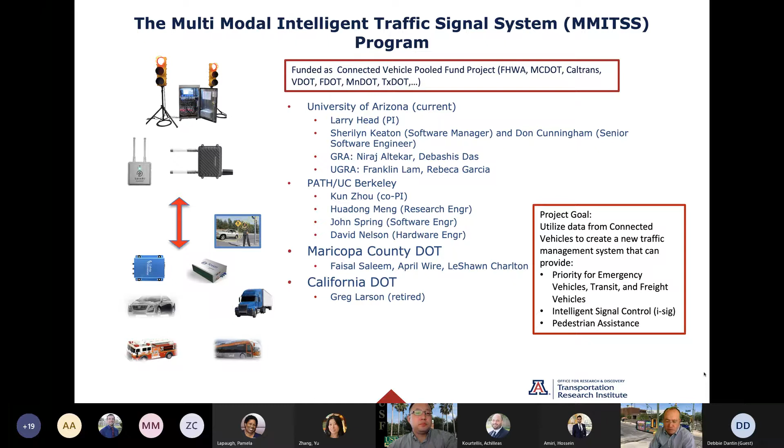What the Connected Vehicle Pooled Fund asked was they wanted to use connected vehicle technology to create a new generation of traffic control or traffic management system that could provide priority for emergency vehicles, transit vehicles, and trucks, could do intelligent signal control, and then they asked for some pedestrian assistance to be integrated into it.

So we started back in 2012, we did a ConOps and requirements, and then we did a demonstration in phase 2 that started in 2015. If I was going to have any gripe with the pool fund, it would be that they have these large gaps between work years. You get a bunch of students funded and then you wait a year or two and then you fund them again. It's a little challenging at times, but we built the prototype system and we deployed it and we tested it.

We did tons of demonstrations and taught people about connected vehicle technology. And then what they asked us to do, which is really unusual for an academic project, is they said, well, it's really nice, but it's hardware dependent and we want you to be deployable. So can you turn it into something that's more deployable? We've had to go back and redo all the source code and documentation and things, and we're in the middle of a 90-day field test. With COVID going on, field testing is really hard.

So some of the basic ideas go like this. If you have a traffic system, typically if you're going to manage it, you break it into control sections, right? And maybe in this section of the network, you have a bunch of warehouses and manufacturing facilities, and the vehicles that are going to be traveling through there may be a high percentage of freight vehicles.

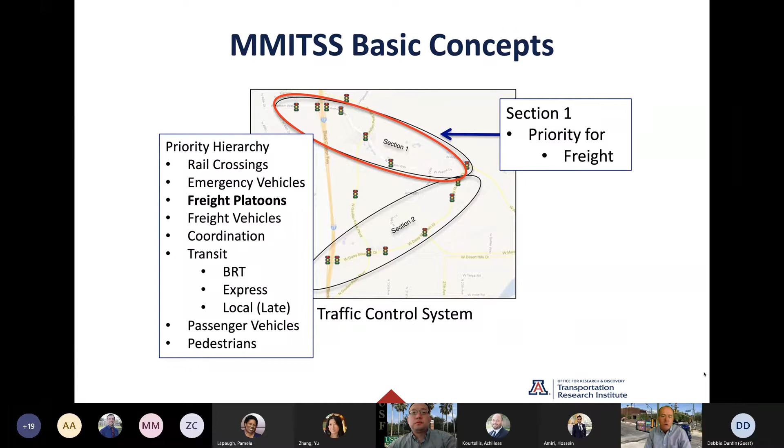So you might want to set up a hierarchy for control. Of course, rail crossings are first and then emergency vehicles, but maybe we want to give priority to freight platoons and then freight vehicles. And then maybe we want the signals to be coordinated, and then transit, and then passenger vehicles and pedestrians. So that might be what the operating agency feels is their level of priority for different kinds of vehicles. Here's another section where maybe there's a lot of transit and pedestrian, and we would want to give priority to transit vehicles, and then maybe strings of vehicles and pedestrians and passenger vehicles. However they want to set this up, that should be there for them to decide.

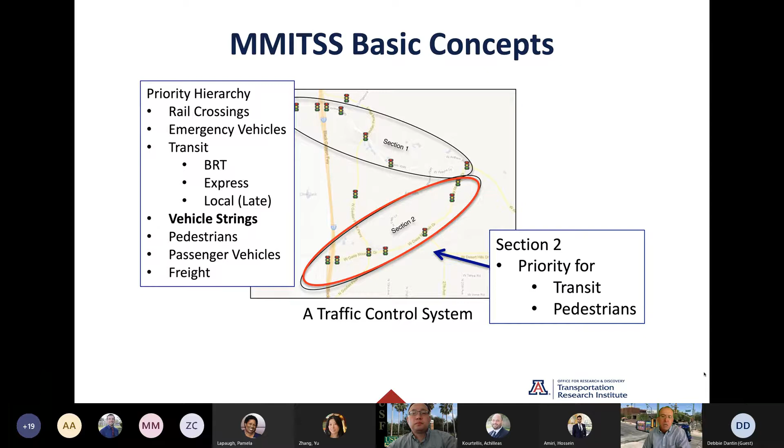And in a connected vehicle world now, we would have lots of data to help us set that kind of hierarchy up. The other thing that's really great in a connected vehicle world is that we can measure, or as Wei-Bin Zhang at Berkeley called it, observe performance by mode, by movement, by section. So we can get all the traditional measurements, but I want to introduce this idea of smoothness of traffic flow to you later today.

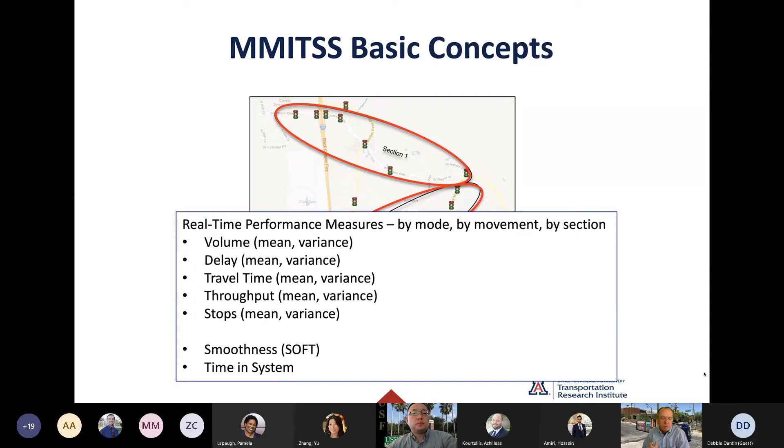So something that we call SOFT. Just a few characteristics - I think it's a little bit more of the history, but we use all the connected vehicle messages that are defined in the J2735 standard: basic safety message, map, signal request, signal status message, and SPAT.

ISIG really is what we think of as adaptive control, and it's an outgrowth from some work in the 90s on RT-TRACS that Federal Highway did. And then if you're familiar with RHODES, that Pitu Mirchandani led the effort on, one algorithm in RHODES was called the COP algorithm, which Suvrajeet Sen and I wrote, and then OPAC with Nate Gartner. So the ideas around that component are really motivated by them, and Yiheng Feng, a student, he modified it to do some things with the dilemma zone.

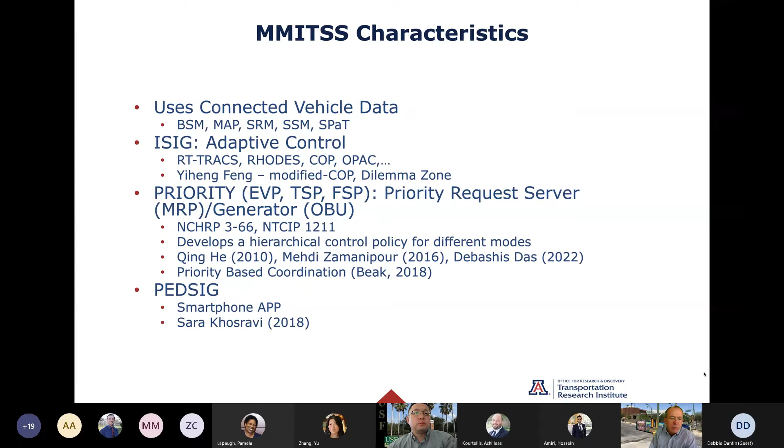And then the priority work really started back with a project called NCHRP 3-66, which Tom Urbanik, Darcy Bullock, and I, and Doug Gettman worked on, and that became the NTCIP 1211 standard. It really sets up the framework. And then I've had several students, including Qing and Mehdi, and now Debashis, working on this priority-based control. And then Sara Khosravi was a student who did the PED-SIG, and she works at CAPSH now, and they've taken it and made it into a product that's out there.

So just to frame this up: when a priority-eligible vehicle - whether it's an emergency vehicle, freight, transit, coordinator, a platoon of vehicles or string, or another intersection - gets in the range of the RSU or wants to communicate with the RSU, there's this map. Vehicles receive the map, and compute their position on the map and use that to estimate their estimated time of arrival or their desired service time. Now if you're shaping the trajectories like you guys do in your research, that time may be the departure time in your algorithm, right?

Then the vehicle sends something called the signal request message to the roadside. The infrastructure responds back with something called the signal status message, which really is an acknowledgement of the SRM. If you send me a desired time of service, I'll send it back to you from the infrastructure to make sure that we're in agreement. Then when the vehicle passes through the intersection, it can send a cancel, and the infrastructure can go back to other priorities. This is really the use case for priority-based control.

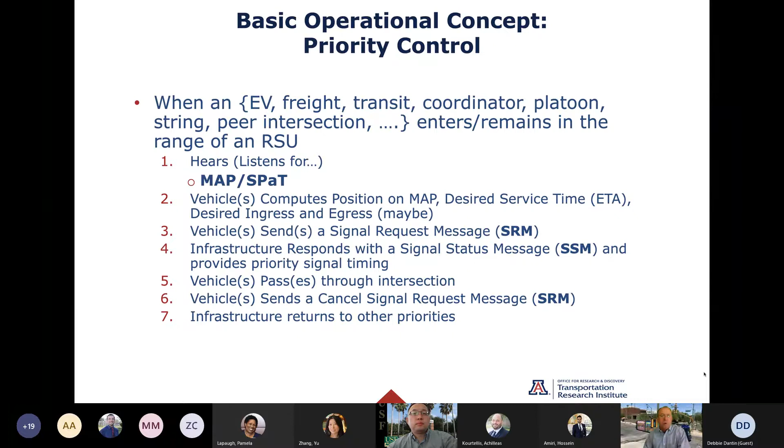Who can ask for priority? Well, all these different kinds of vehicles, and coordination, could ask for priority, and I'll explain that in a minute. And then these platoons and strings, which we're working on now, how to get this done. And then queues and other intersections. We did for Utah DOT, who's a big user of MMITSS, a peer-to-peer capability for them to kind of give more headway into getting the priority requests in the system.

So this is the architecture for deployment. This is really kind of funny because I drew this diagram in 2011, I think, and we haven't really changed it. You start down here with vehicles, and we have two kinds of vehicles: equipped vehicles and unequipped vehicles. An equipped vehicle has an onboard unit that can talk to a roadside unit.

That roadside unit communicates with something we call the MMITSS roadside processor. Think of this as an edge processor. Actually, we're working with Intel. They're building something called a smart RSU that is an edge processor along with a radio unit.

And then that's what communicates with the traffic signal controller. The same way with the non-motorized travelers, they might have some type of nomadic device like a smartphone that could connect into the system through the cellular network or Wi-Fi or somehow. Maybe someday with 5G we'll have a more direct link there. And then that closes the loop over there. And then, of course, there's security that you have to take care of up at the top.

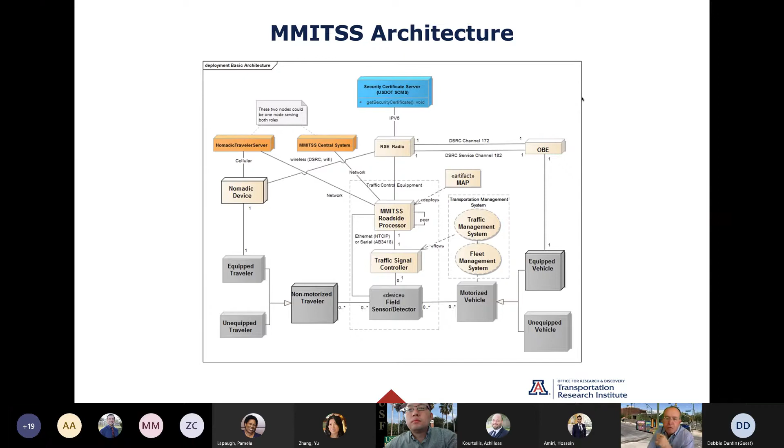So I'm happy that this diagram has survived over time. Our MMITSS architecture, this is our software architecture. I like to talk about this before I talk about the algorithms, because then you'll kind of see where things fit in. So we have a MMITSS roadside processor, that's the edge processor, and then we have a server that's available, and then every vehicle has a vehicle processor.

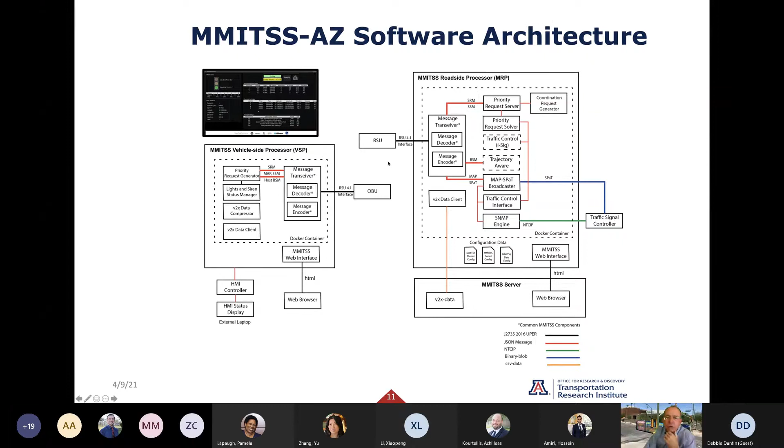And because in phase 3 they want us to be agnostic to the brand of the RSUs and the OBUs, we used a standard interface that Federal Highway defined, this RSU 4.1, to be able to talk to them. And then we have a little display, I'll show you that in a second.

So let me talk about the roadside processor. The roadside unit is really just a radio to us. There's no processor in this unit, right? And so we have this message transceiver that encodes and decodes messages. We do this in this component because as the standard evolves and changes, we just have to update this component.

Then these messages inside the box - the priority request server receives signal request messages and turns back signal status messages, but they're not formatted as messages, they're just JSON strings that we pass around between the components. The priority request server is responsible for taking the requests from all the different kinds of vehicles and managing them and setting up that hierarchy.

And then really what I'm going to talk a lot about in a few minutes is this priority request solver, which solves an optimal scheduling problem to be able to accommodate the priority requests. And those requests could come from coordination.

The two components in the middle, the ISIG and the traffic control and trajectory aware, are dashed lines because in the phase 3 effort we haven't put a lot of effort into redoing all that code - in our field deployment we just don't have the market penetration that's really required to accommodate doing some intelligent control or adaptive control with the small amount of data that we have available. We have 15 vehicles, and that's not enough in a network.

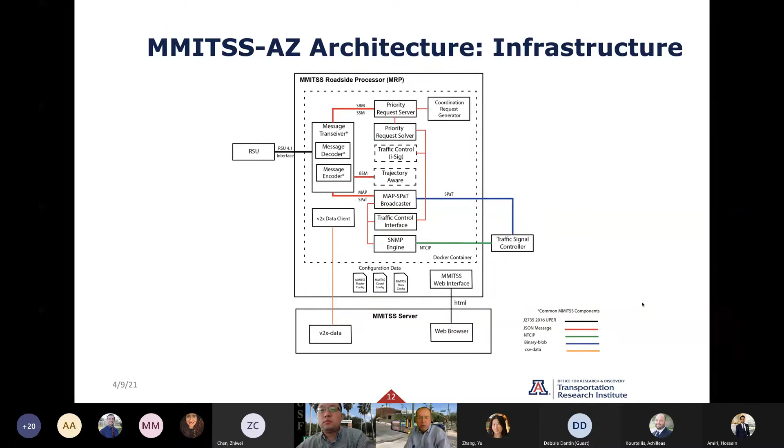And then on the vehicle side, it's exactly the same message transceiver, because we want to get rid of all those nasty rules of encoding and decoding messages, right? And then we pass the same kind of JSON objects off to something called the priority request generator.

The priority request generator is this part that's keeping track of the vehicle position and taking the position and seeing if there's an active map. And if there is a map and you're on the map, then it generates the request for priority. All right, so it's the vehicle side logic.

And if it's an emergency vehicle, we have to have an interface to the lights and sirens. So we have a lights and siren manager. And then because we don't have real-time offloading of the data, we just do compression of the data that's there, and then we offload it at different times with a laptop.

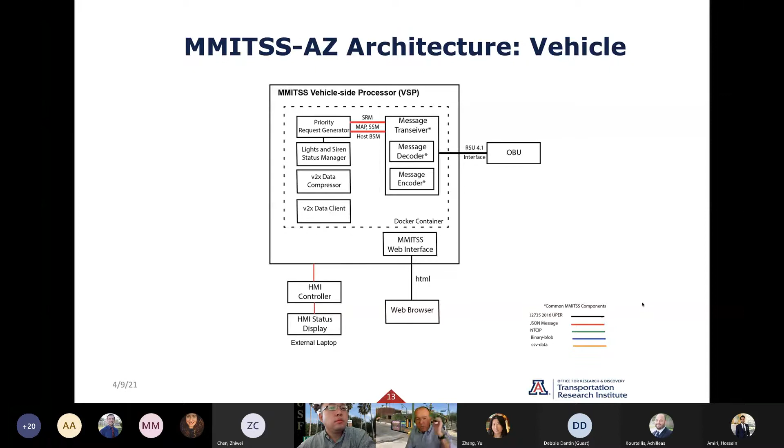We have this display that we've created that's really just intended to help us when we're out in the field testing. So it shows you in the upper left-hand corner the SPaT data with the minimum and the maximum phase times and what the display is, which depends on what lane of the map that you're in.

Shows you what the signals are doing, what phases are green, yellow, and red, and whether there's pedestrian service going. For the host vehicle, we have what kind of vehicle are you, what's your temporary ID, your speed, and information like that. There's a couple of indicators at the top.

So when you're on a map, at the bottom, you'll see we have a list of 5 maps that are available. And when we receive a map message, we retain that for up to 5 minutes, 300 seconds. And then we delete them to keep the cache of maps cleared.

But when we have a map and we're on the map, we show it as being on the map. And then when we send a request, our request will be active. Then the active request table, the signal status message comes back out with all of the requests from all of the vehicles.

So there's an EV vehicle that's requesting, and a transit vehicle and a truck vehicle. And so whether they're rejected or granted, how many messages have been received, what lane of the map they're on, what their arrival time is. And then if there's other vehicles in the area, we call them remote vehicles, we get their basic safety messages.

And so this has been a really great tool when we're doing demos or we're out in the street testing, so we can make sure that everything is on the vehicle side, looks good.

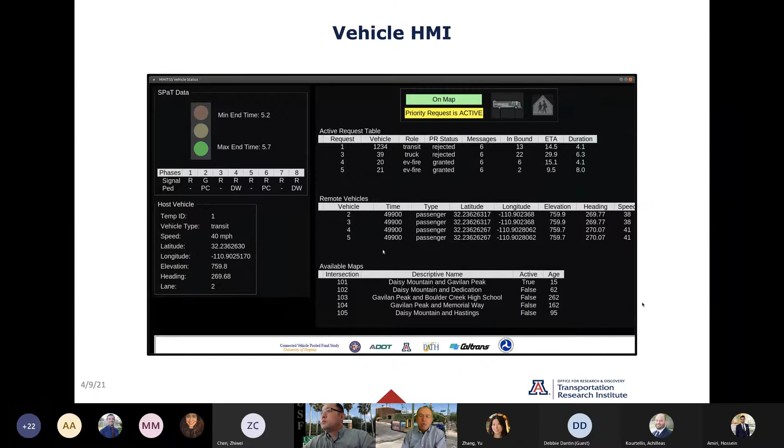If you're interested, you can just Google MMITSS and GitHub, and you'll find all the source code. We try to keep it up to date. We have a new release every so often. We're about to have one next week, has some new features in it.

There's some common components. There's a map engine and a message library that Kun at Berkeley developed that are really, really useful components if you're dealing with this, so you don't have to deal with the map message itself. You can just call the functions in the library. And so this was a great contribution from Kun.

And then if you want to run things and you don't want to be the software engineer that builds it, you can just download the different Docker containers. So there's x86 base for doing simulation. There's one here that says updated 5 years ago, that's the phase 2 version of MMITSS. Then there's the ARM base, and we use ARM base for both the vehicle and the roadside unit processors. So you can download these.

Okay, so that's enough about the system itself. Now I want to talk about the basic principles behind priority-based traffic control. I suspect this group knows a lot about traffic control, but this is a diagram that I use to describe some of the terminology.

So this is an intersection. This is in Noblesville, Indiana. This is from a project Darcy and I worked on.

Down here in the corner is the dual ring 8-phase traffic signal controller, which is the standard in North America and used in many parts of the world. Other types of controllers have other kinds of logic to them, but we really focused on this one because it's the most common in North America.

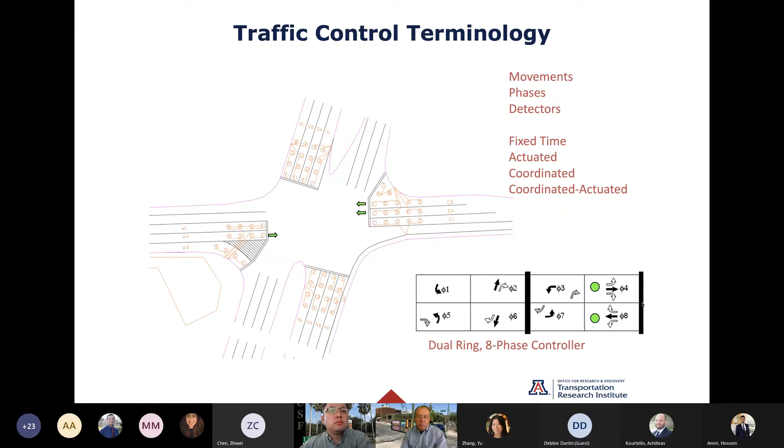There are lots of kinds of ring barrier controllers. Our company had one that was 20 rings, 40 phases, and 26 barriers. 26 is a magic number because we represented them by letters, A through Z, so that's why we were limited. But what I did, when I left industry and came back to academia, was...

I was really worried that we had this software but didn't have an underlying model. So a model of this dual ring controller is this precedence diagram, and this shows two cycles of what I just showed you, but represents it in a more mathematical way so we could bring it into an optimization problem. It's the same thing.

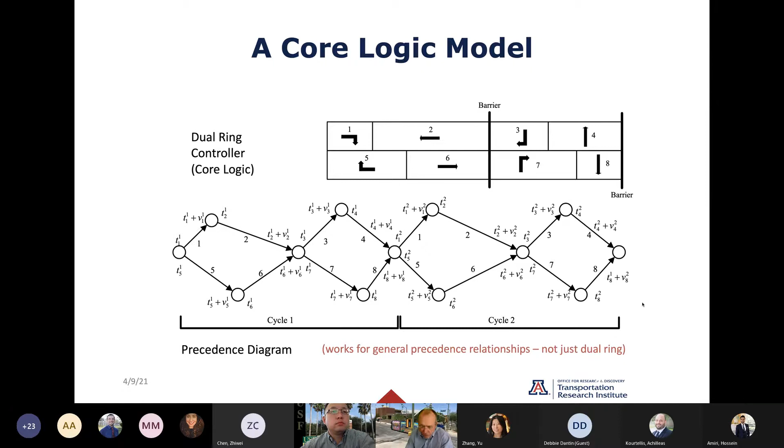Phase 1 has to time before phase 2 because we can only have one phase active in a ring at a time. Phase 5 and phase 6, and then when we cross the barrier, we get to 3 and 7, and 4 and 8, and we repeat this over and over again — this sequence repeats. So now I have this graph structure, a precedence graph, that we can use for different kinds of controllers, but we're just doing this dual ring 8-phase for now.

Every phase in the precedence graph also has its own precedence graph of these sort of intervals. You have to have a minimum time — minimum is a safety parameter in a traffic controller. Then you have an extension period where, if there are detectors, you may extend out for some amount of time for every detection event. You could have a signal control prioritization in the NTCIP 1211. We have an interval you can extend there.

If the pedestrian is serving, then you get the walk and the flashing don't walk, and then a don't walk interval. The walk and flashing don't walk have to time before you can terminate the phase. And then some controllers have a minimum, an alternative minimum green time. So these really constrain what we can do to the phases in terms of stretching and compressing them.

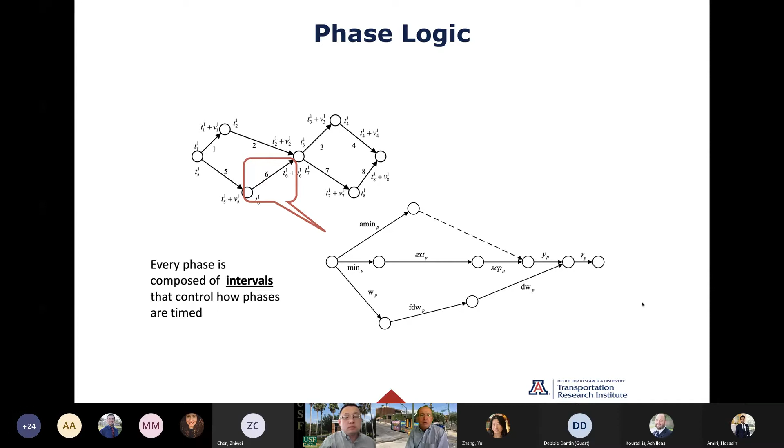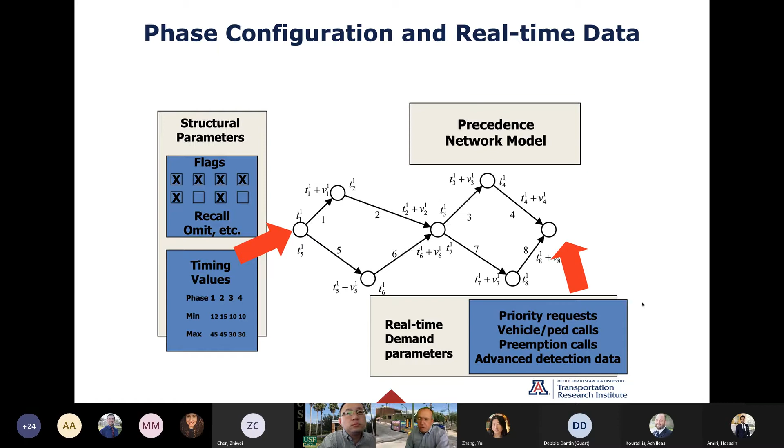So you take all these structural parameters — whether phases are in use, recalled, or omitted, whatever — you take the data that goes with the phases, the timing values in the database, you take the real-time data that goes with it, and then we can form this precedence model. That's what we're trying to do.

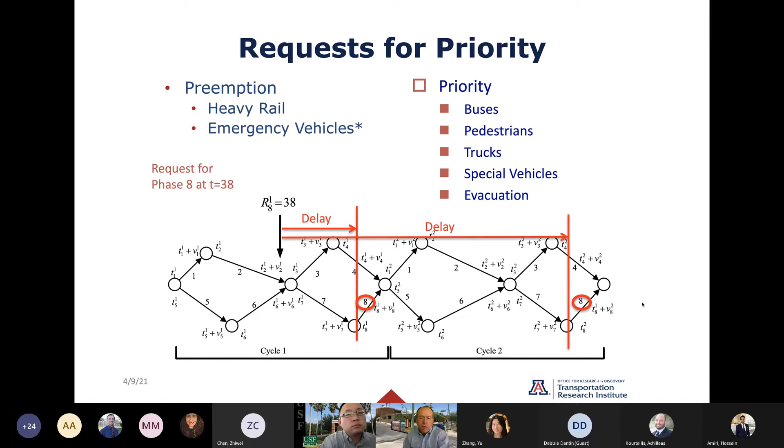So there's delay before it could be served there, or there's this amount of delay. Clearly, the obvious thing is I want to get phase 8 green as soon as possible. So if I could compress this down a little bit and get there, I would reduce the delay for that request.

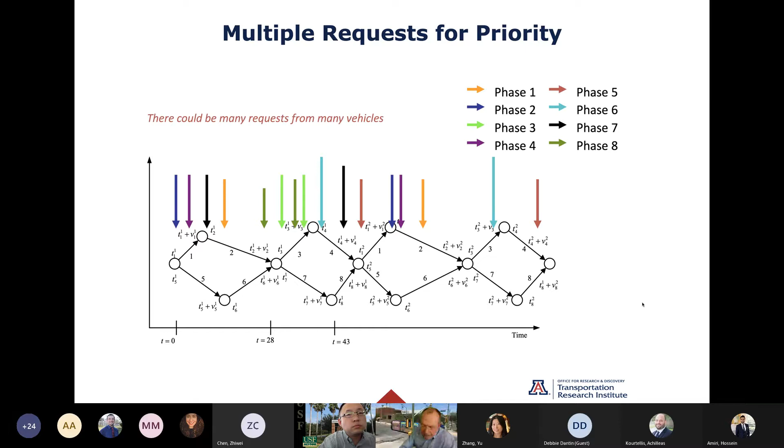But I can have all kinds of requests, and we've done this. We've had requests for every phase occurring randomly throughout from all different kinds of vehicles. The problem is that this is a math programming problem. It's a mixed integer linear program, and it takes time to solve. So we can't really accommodate an infinite number of requests because every request adds to the problem.

This is the model formulation. I'll go through this a little bit, but we minimize what we call the multi-modal delay, and that's the delay from transit, trucks, and emergency vehicles. We have coordination delay, which is another consideration. If we want the signals to be coordinated, we treat that as a form of priority.

And then we've added this other term on the end called actuation flexibility. This goes to wanting to have flexibility in the signal timing to allow phases to gap out or allow phases to do their natural behavior with the vehicles that are locally present. I'll show you how that's in there. Notice it's a minus sign in a minimization problem, so we want to make that as big as possible. We want as much actuation flexibility as we can when we're dealing with all of these delays.

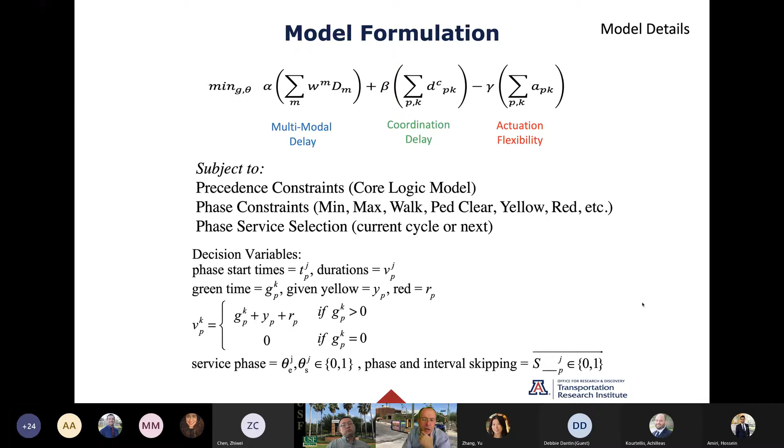So then this is subject to the precedence model, the phase constraints from that I showed earlier, and then something I call phase service selection constraints. The precedence constraints are easy. These are nice, simple linear equations. Anybody could write these—this is a no-brainer. It just represents the precedence graph.

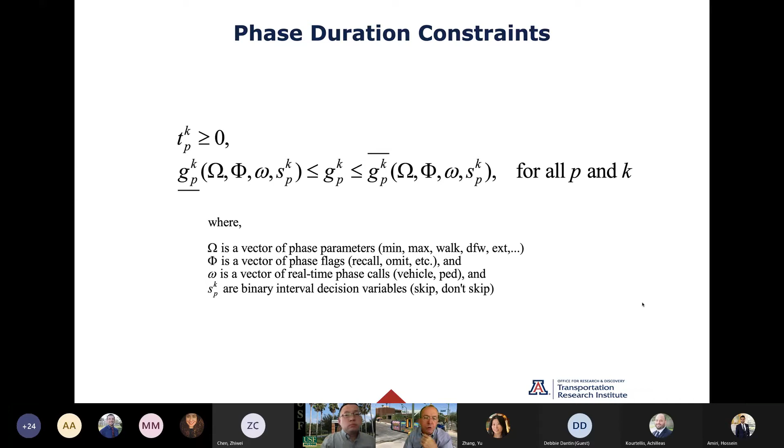The phase duration constraints, while it may look fancy in this diagram, really just take into account all the different parameters, the flags, and whether there's real-time calls to get a minimum and a maximum green time. So there's some logic, these functions that take these indicator variables, if you will, and develop a minimum and maximum green time. That's really all that this logic does.

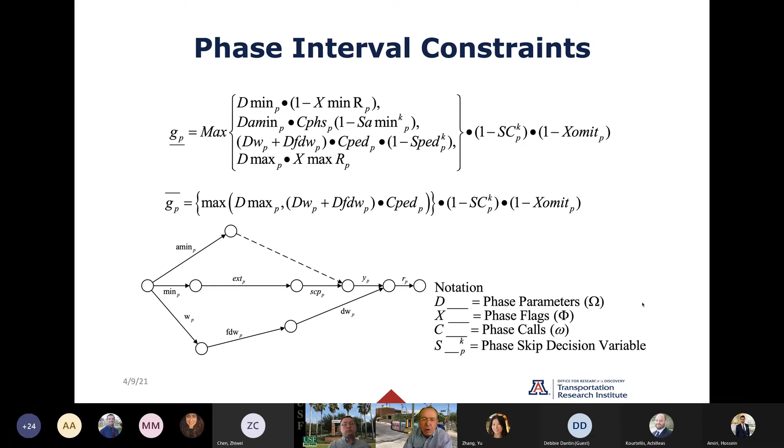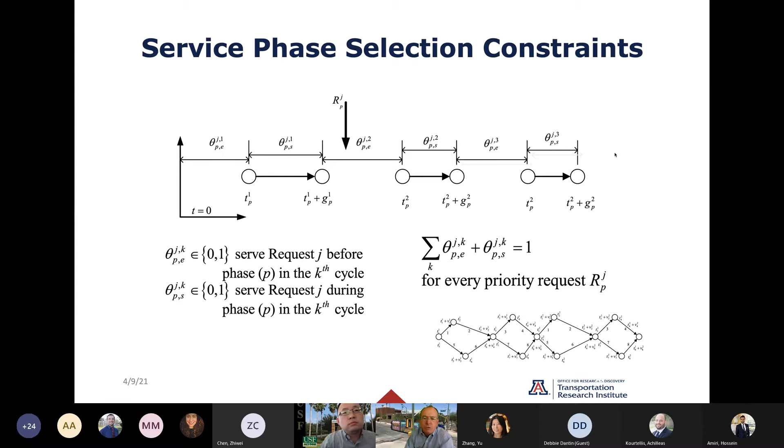This is an assignment, so it's a binary variable assigning it to one of these intervals, and we're going to try to assign it to the different intervals in a way so that we can minimize that delay. So that idea can be written as a set of constraints using the big M method, and it just takes a little bit of time to figure out how these represent that. They can be simplified and reduce the number of variables, but this is the most descriptive way we've got of showing it.

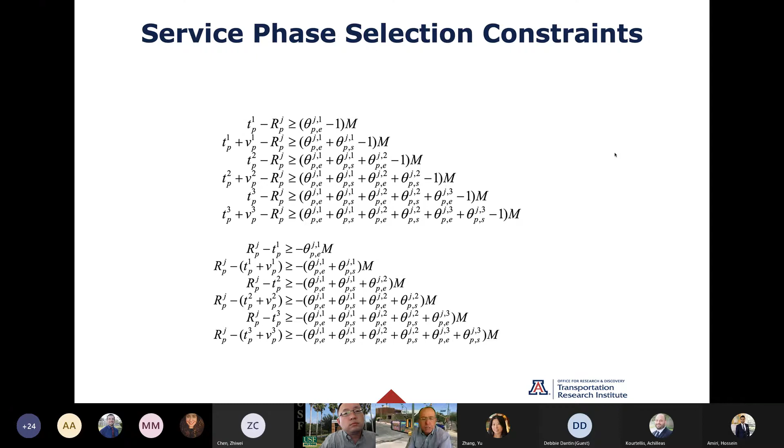Okay, and so then we got the delay, right? Don't freak out and think it's nonlinear—this is just a representation. We have the delay of all the priority requests between the time when the request is the estimated arrival time and when the phase starts serving of where we can have those requests. And then we've rewritten this so it's a linear problem by moving this into the constraints and using dummy variable type logic, that everybody that does math programming knows how to do.

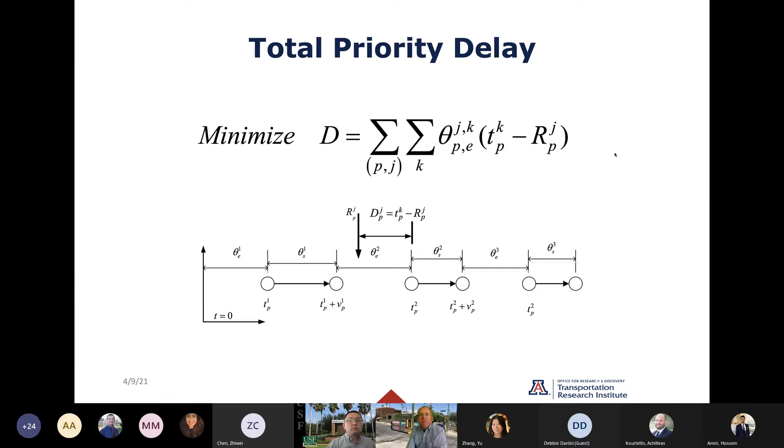I learned a long time ago, when I go and try to put this stuff in the street, if I don't develop some tools for communicating with the traffic engineers and the technicians, they just look at the equations and say, I have no idea what you're talking about.

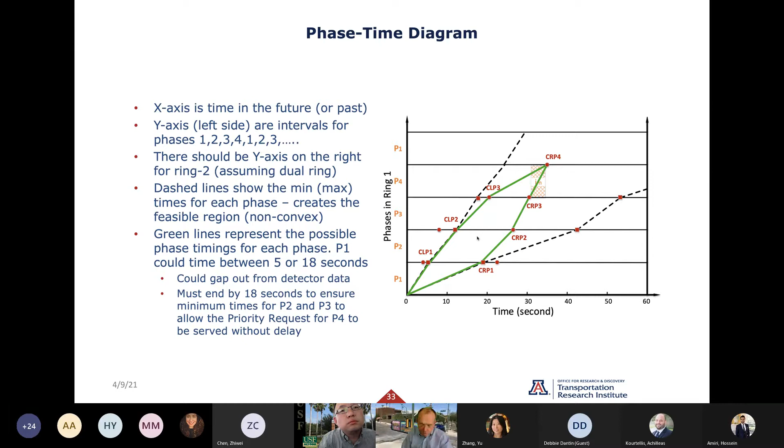And so on. In that optimization problem, the volume of this area is actually what's in that term, and we want to make that as big as possible, because then we can use the COP algorithm or whatever to accommodate the vehicles arriving that are not priority eligible.

Once we solve that problem and get a solution, we need to understand the schedule. It's a little complex, but here we'll translate this into how we talk to the traffic signal controller, so we can call phases.

On this phase-time diagram, you can see these little C's, which are the call events. When we get to the right critical point, we have to force the phase off so we can move on, so you'll see some FOs in here. They're not super clear in this diagram, but that's where we force the phases off.

We could hold a phase, like holding it green longer than the time, actually holding it to the left critical point, and then we have to clear that hold. If we wanted to skip a phase, we could omit it.

These are the NTCIP commands we use when talking to the signal controller, and that maps onto the solution we get and tells us what we want to do. If we want a phase to be able to gap out, we just don't hold it and don't force it off — we let the natural phase behavior take care of that.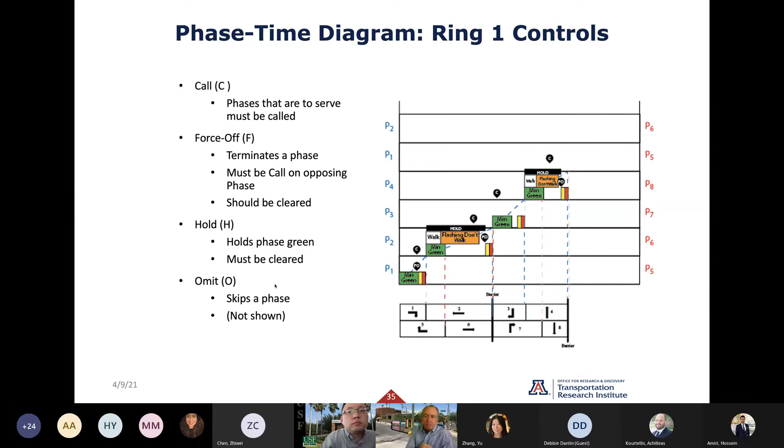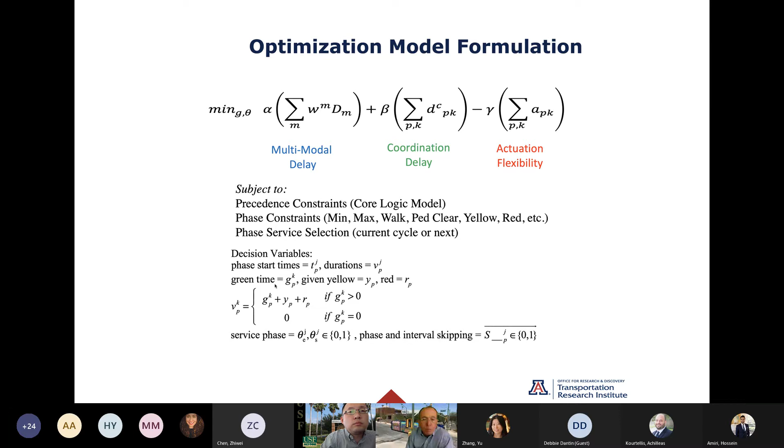So go back to the model — you've seen the multimodal delay and the actuation flexibility, and I hope you have some appreciation. I know I'm going fast, but I want to leave time for questions — some appreciation for how the constraints work in the problem.

What I want you to think about now is these weights, these parameters in the objective function, as being sliders. These are the controls we give to the traffic engineer to set up their policy.

In this example, coordination has a very low weight, and beta here has a very low weight. The actuation flexibility — I still want quite a bit, so we put it around 1. We're really interested in multimodal delay, and emergency vehicles by far get the most. We override the other vehicles, but in this example freight is more important than public transport.

This is actually a slide for a talk I'm giving next week in Australia, so we call it public transport. But this idea gives the traffic engineer a way of controlling this.

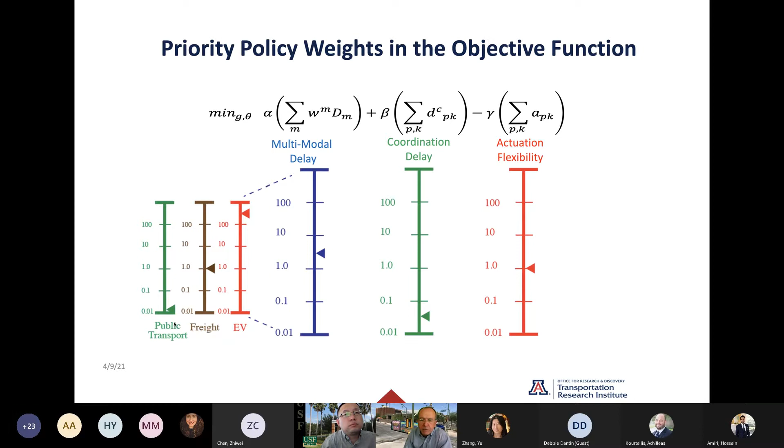Mehdi Zamanipour did a nice example illustrating the ability to shape the performance surface of this system. We run this simulation many times, but transit goes back and forth east to west and trucks go north and south. In this particular example, there are 2 transit vehicles and a truck.

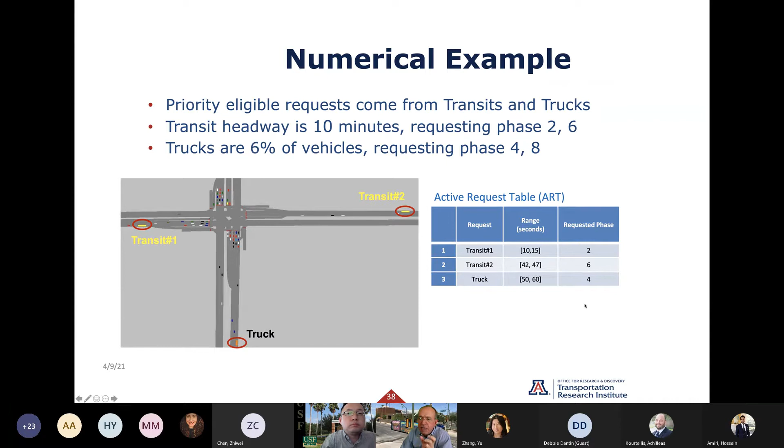This is our active request table, showing the estimated time of arrival as a range and what phase they're requesting. We ran this simulation with lots of different weights, and here we're only looking at transit and truck, because if we have an emergency vehicle, we don't consider transit and truck, except we do dilemma zone protection for trucks.

But we varied the weight: transit was 1, truck was 0 on one end; on the other end, transit was 0, truck was 1. And we used a bunch of different combinations in here.

Each of these points represents a 30-minute warm-up and a 1-hour simulation with 10 replications of the simulation model of that intersection I showed you before. This is a contrived example that allows us to show that by changing the weights, we're able to minimize the transit delay, but as the transit weight tends back towards 0, its delay goes up. So we really can show that.

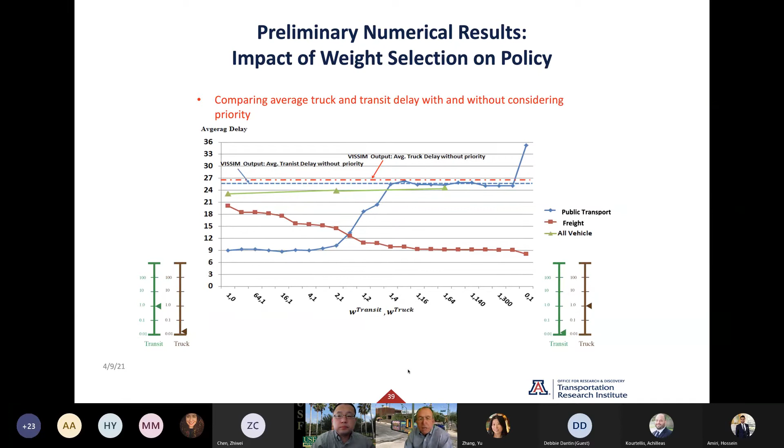Here's the freight weight going the other direction as freight becomes more important. This green line represents delay to the other vehicles, and the red and blue lines show what happens if we didn't have any priority at all across the weight. So we're doing a lot more with this multi-criterion decision making, looking at the Pareto frontier and things right now. Debashish Das is doing that, but we're able to demonstrate that the weights can be a powerful way of shaping the priority.

So let me talk about coordination. I really think coordination is a form of priority. If you look at how traffic controllers have been built over the last 50 or 60 years, they have their coordinator. When you do preemption, you throw coordination out the window — you do whatever you need to for preemption, then come back and seek transition back into coordination. But what if we just thought of coordination as a form of priority, where the goal is to get the phase green when a group of vehicles is going to progress along the coordinated route, because that's what we really want — this progression along a coordinated route, which is why we use coordination. Priority's goal is to get the phase green when a priority-eligible vehicle wants to progress along its route. So with a few change of words, they're the same thing.

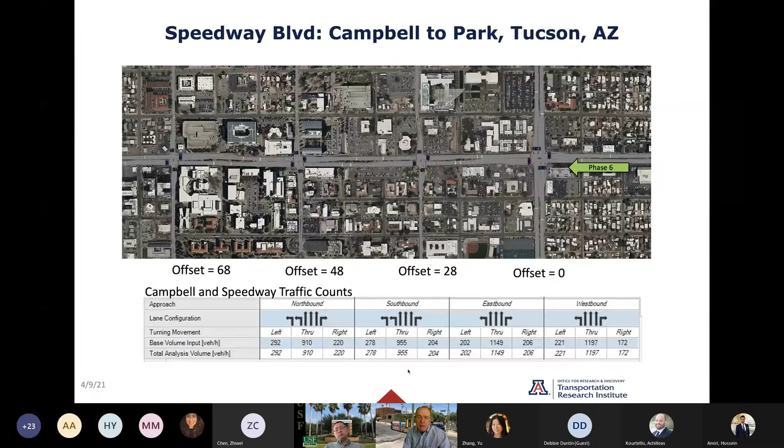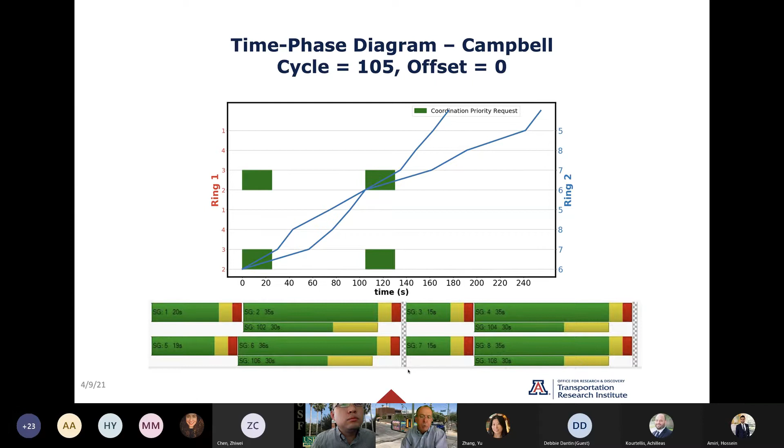So I'll use this example, this is Speedway near the University of Arizona. We developed a coordination plan with an offset of 0, 28, 48, and 68 for vehicles to progress down Speedway. We'll look at each intersection — we schedule the coordination event for 2 cycles. So this is phase 2 to be coordinated with 0 offset, and then 105 to 110 seconds later, you'll see those requests again, and then the lines indicate the region where the left critical points and right critical points are, where we want to serve the priority requests. This is the first intersection, and this is the second.

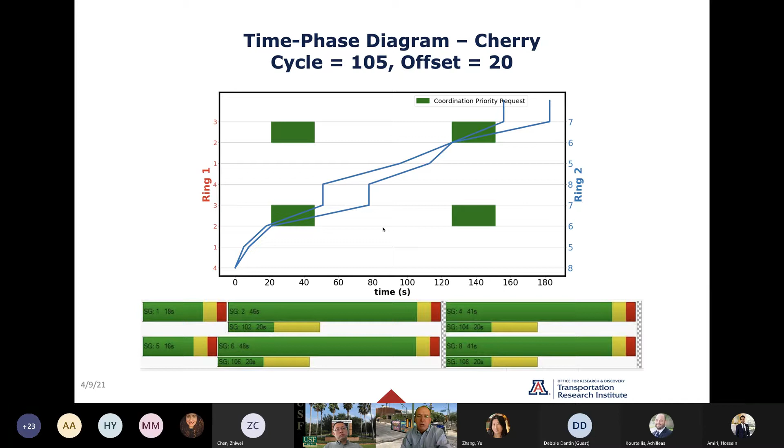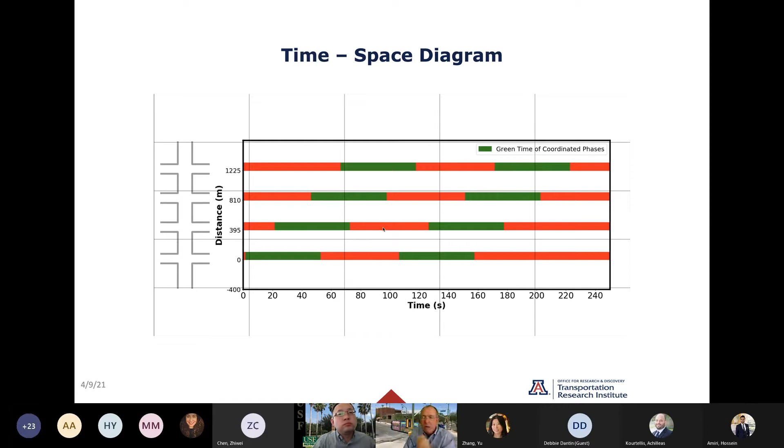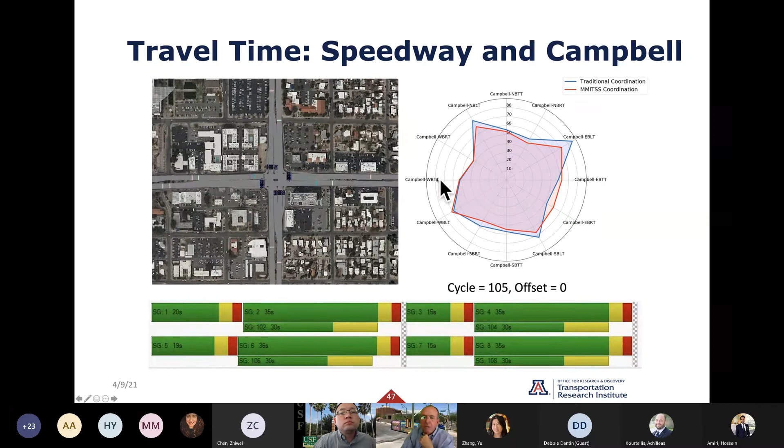Looks pretty good. We wanted to compare it to traditional coordination versus what we're doing, so again we ran the simulation — I think 10 times for an hour — and collected travel time on the different movements at the intersections. We compared them between the two and represented it here on a radar diagram: Campbell northbound through movement, northbound right turn, northbound left turn, and we wanted to see the difference. Here's the eastbound left turn, eastbound through, eastbound right turn, and the southbound and westbound. They at least have the same general shape.

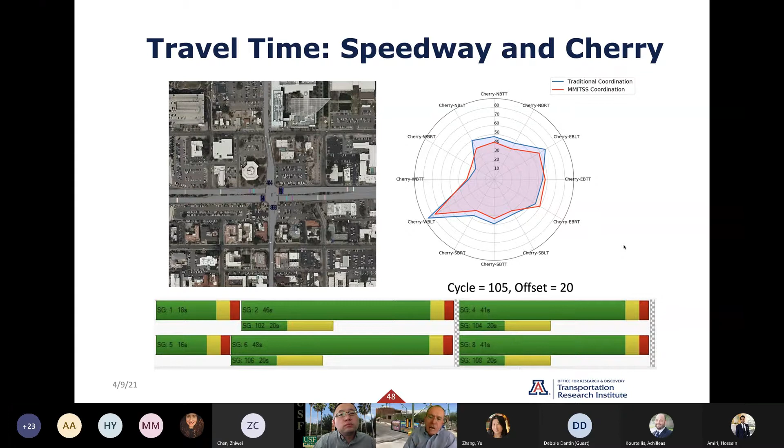This is the next intersection, and they don't like the westbound left turn there. So again, I think we were able to capture the same sort of traffic behavior at Mountain and Speedway, and the same at Park. It's not identical, but my claim would be that our simulation testing reflected that it really is essentially the same. We need to show something with priority and coordination — I'll show you that in a second.

We've talked to the people at CAMP who are doing TOSCo about adapting the signals with this platoon information going through there, and UDOT has asked us to do some adaptive coordination based on the flow of vehicles in the corridor.

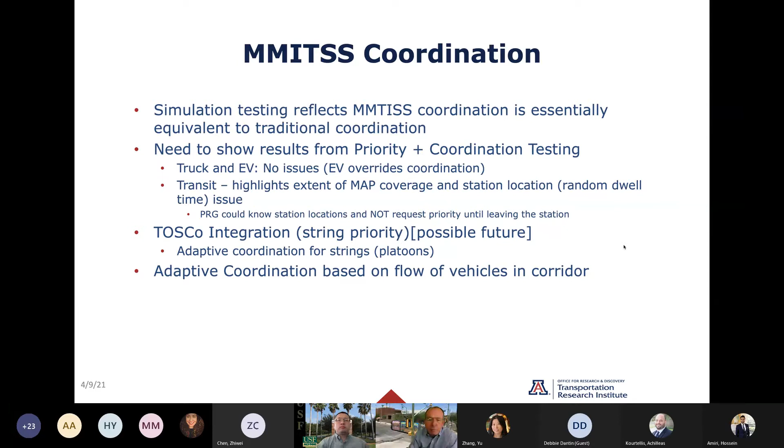If you get an early green and you release the platoon, then you should schedule the downstream intersection to be a little bit earlier. So this is just a simple example.

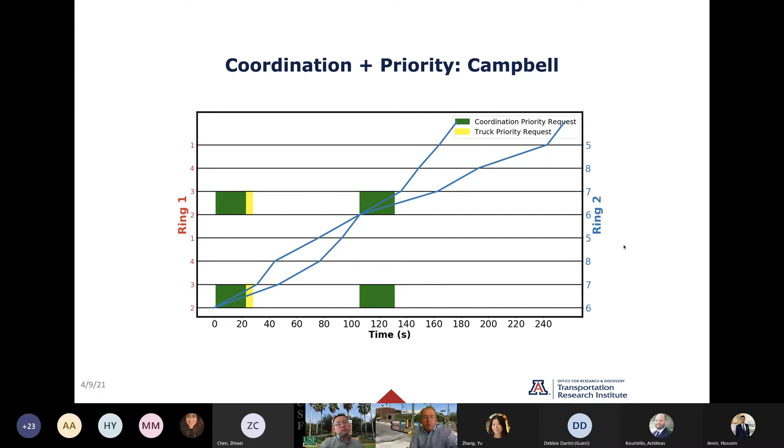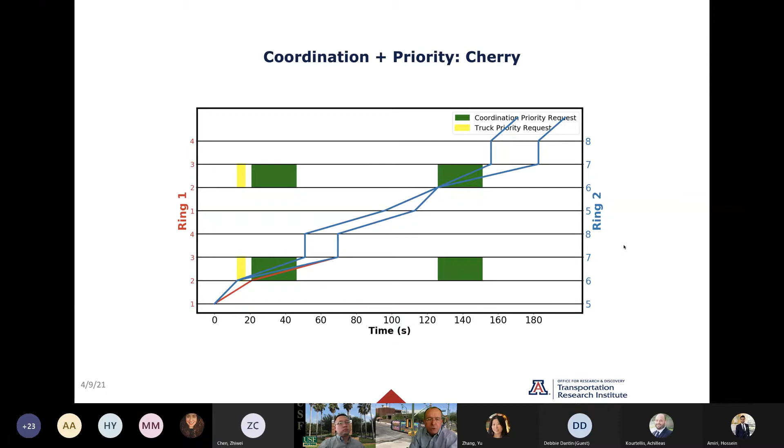I'm going to stick this yellow truck on there, so it was going to arrive right after the coordination event. At the first intersection, at the second intersection, it was going to arrive a little bit early, but we're still able to accommodate serving both the truck and the coordination point.

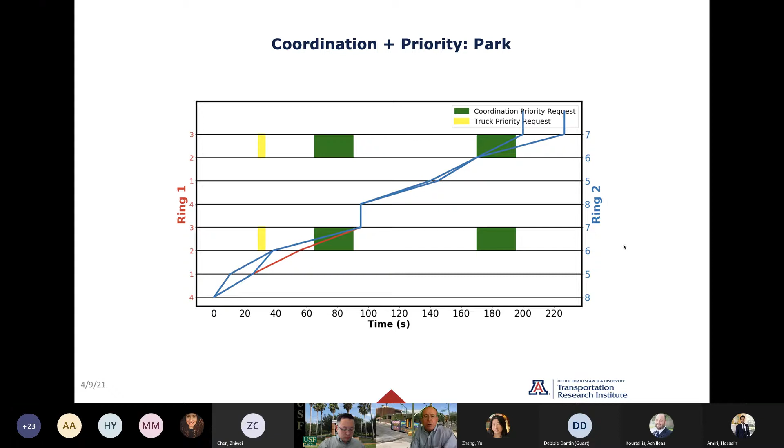This is the fourth intersection, and actually at this intersection we delayed the truck a little bit, but the coordination was able to be accommodated. Of course this would change if we changed the weight for truck over coordination. I don't remember exactly in this experiment what Devashish used.

So again, I think we've shown that they're kind of equivalent. We're in the process right now of running this in the field. We haven't been able to do field tests in quite a while because of COVID, but we will be out there on Monday next week, running a bunch of vehicles, and I'll have some data from that.

Real quick, I just want to talk about assessing performance. You guys know all about trajectories, and having trajectories means you can compute all these measures. I like Weiben's way of saying it: we observe them, we don't have to estimate them.

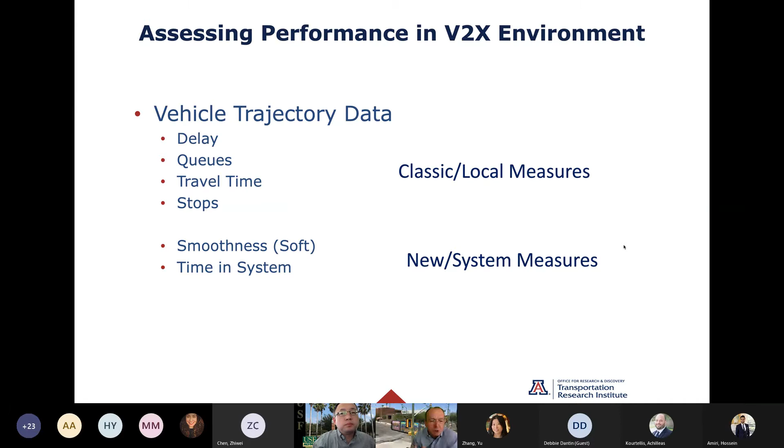Now I want to talk about this measure of smoothness. When you're moving trucks especially, and other vehicles, but if you're moving trucks you really do care that they don't accelerate and decelerate. So here's four different speed profiles of the vehicles.

The first one looks like the vehicle goes along at about 15 meters per second, pretty good speed. The second one over here has a lot of stop and go behavior. Here's a third one where there's a little slow down and speed up, but looks pretty good. And then this one has a little more variability to it.

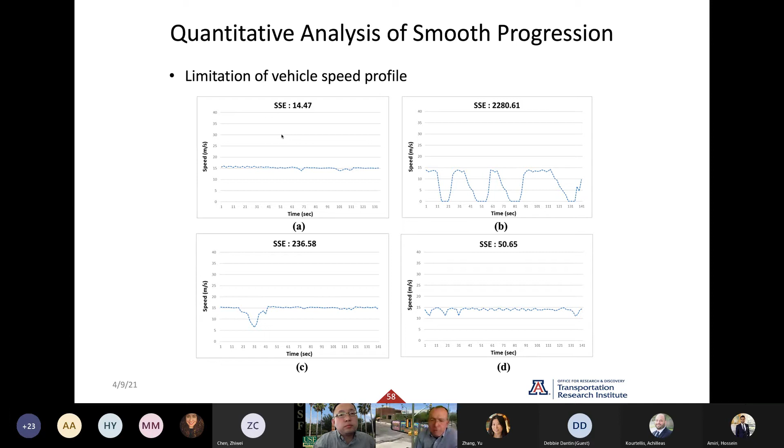So we looked at these and we computed the sum of squared errors from constant speed, and we're trying to think of what's a good measure. This is where we came up with this idea of this measure we call soft.

I'm going to skip this slide and go to this slide. This shows two trajectories, think of these as sample points of trajectories over time. This is a very smooth looking trajectory compared to this one, which is a lot of stop and go.

If I look at this from a signals point of view, I just look in the frequency domain, take the Fourier transform, and I know that a constant signal would have all its power centered right around 0 frequency. Where if there's a lot of harmonics in the signal or a lot of other variability, I expect to see more power distributed at higher frequencies.

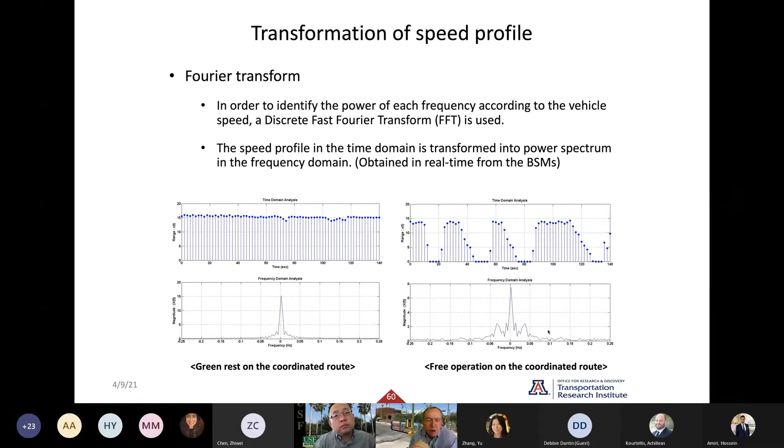So that's what we've done, we've really just taken the ratio, 1 minus the ratio of whatever the power distribution is to the power around 0. So that's this ratio here of the square root of the squared powers, multiply it by 100, and we got a measure of smoothness.

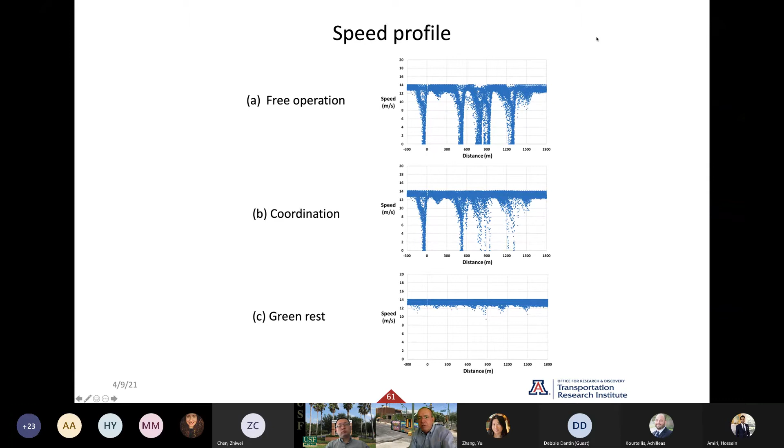So these are the speed profiles from lots of simulation runs, for free operation, coordination, and just resting in green. We expect resting in green to be pretty good, but traffic dynamics cause some speed variability. In coordination, if they were progressing through, clearly a lot of vehicles stop at these first two, but more get through here than they did when they were free. So they arrive at the first signal and then they get into the coordinated flow.

Here's what their trajectories look like and their value of soft. So these are a bunch of trajectories, and this is the soft value for each one of these trajectories. The same thing here when it's in coordination, so you can see the pattern in the soft that's there.

And here's if the trajectories are all mostly just flowing straight through, and so we compute the soft measure. This is 73, 89, and 99. I believe we have a measure that can measure sort of the smoothness of flow.

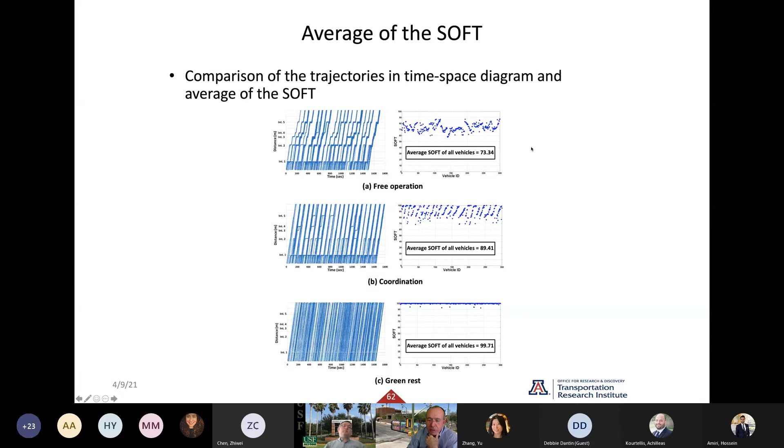So one question we ask is, what happens if we sprinkle trucks in the flow instead of just regular cars? The red dots in here represent when we had 0% trucks, 20%, 40%, and 60%.

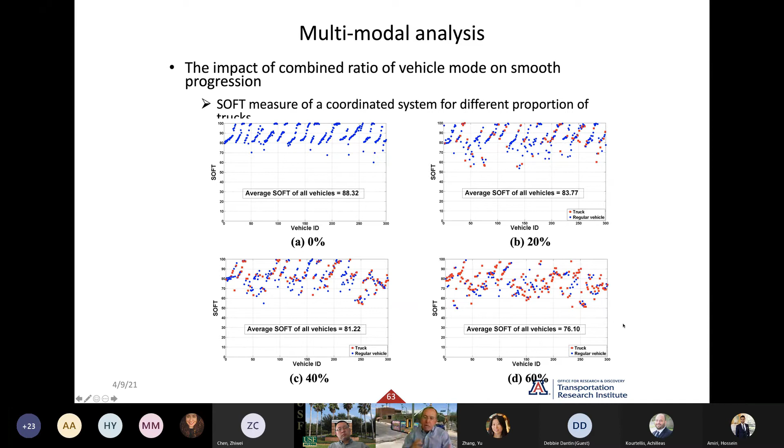Truck dynamics are really quite different than vehicle dynamics. We go from 88 to 83 to 81 to 76, so clearly we're getting less smooth flow the more trucks we have. This is important.

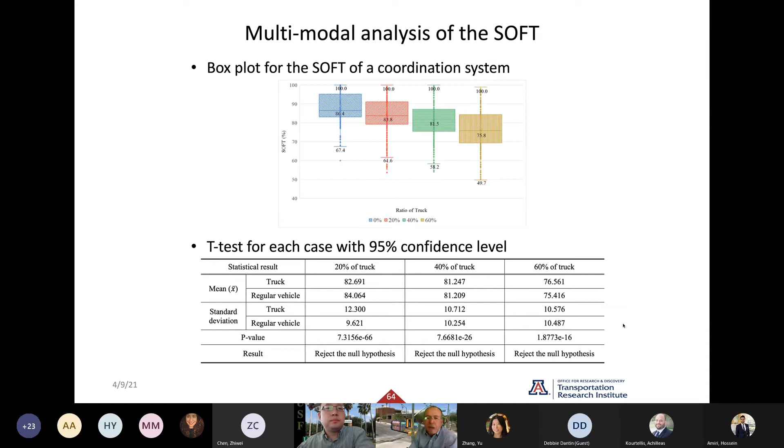So this is testing for significance of whether the percentage of trucks actually impacts the soft factor when we're analyzing smooth flow. The reason we're interested in this is we have this project.

There are 19 traffic signals along this corridor in Maricopa County, and there are two giant Amazon facilities in Phoenix, one at 75th and Roosevelt and the other down at the other end of this corridor. They operate a fleet of 40 trucks going back and forth all day between these two facilities, balancing inventory to help make sure they have what they need to get things out. These are a couple million square foot facilities.

The goal of the project is to use MMITSS and give priority to the truck vehicles to improve flow through the corridor. This corridor got really torn up—every time a truck stops it tears up the pavement, and every time it accelerates it tears up the environment. So we improved the smoothness.

You can see the smooth values. I don't have a summary of the numbers, but we look at truck speed, delay, and stops—those classic measures—and MMITSS makes a tremendous difference on the flow of trucks through the corridor. We reduced stops by about 20%, which is a really good outcome.

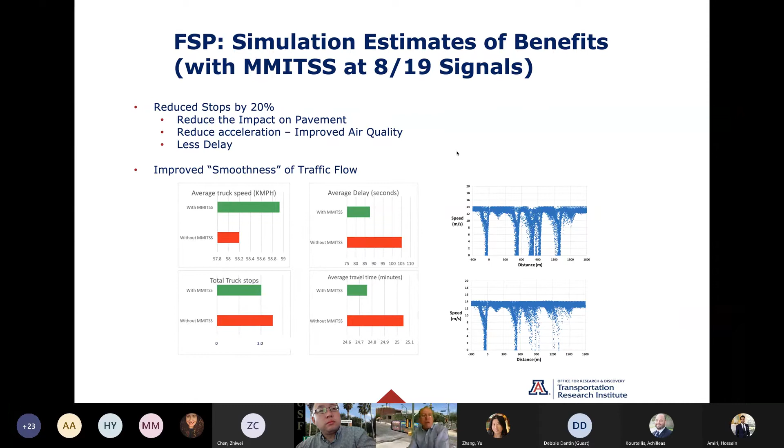We only ran MMITSS on 8 of the 19 signals there. So as Xiaoping said, MMITSS has kind of grown up—it's got to get out of academia at some point. I'm actually tired of doing projects in different places. I'm ready for some consultants to own it or something. I'm not interested in starting a company—I did that once, and that's hard work.

But we have 5 projects in Maricopa County. We have the SMARTDrive testbed, which I'll talk about in a second. We have the Loop 101 mobility project, an ATCMTD project in Scottsdale where we're doing some transit priority. We have the freight corridor I talked about, and we have 2 transit projects, one in Tempe near ASU and one in Mesa.

The PATH team has their version of MMITSS that they operate on Camino Real, with Kuhn and his team. We have 3 traffic signals in Portland on a streetcar route. UDOT has 137 intersections running a version called MMITSS Utah. We're doing a demo project in Madison with 16 intersections. And THEA used MMITSS in the early CV pilot, but they've come back and we're going to do some congestion mitigation using MMITSS in an area where they're dumping some vehicles off.

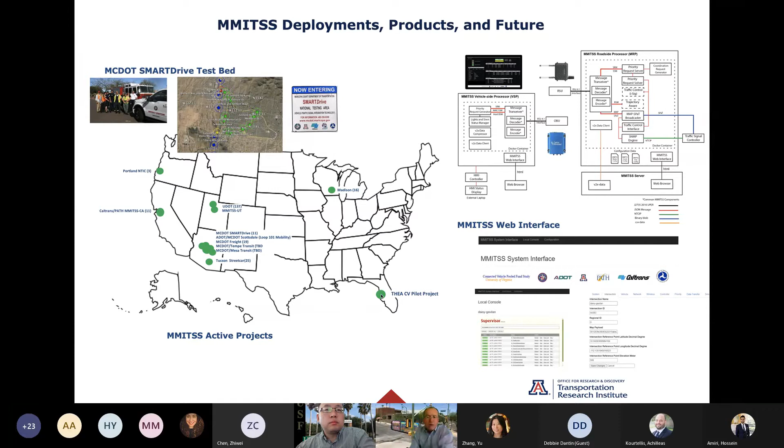I put the software architecture here and a picture of our web interface. I think MMITSS is now to the point where people can take it—it's open source, and they can take it and do things with it.

This testbed we have in Anthem, Arizona has been really important to us. It's 11 signalized intersections where we run MMITSS 24/7, and we're in control of the signals. Not a lot of places in the country, not a lot of agencies would probably let some academic control their traffic signals, so we're lucky to have this.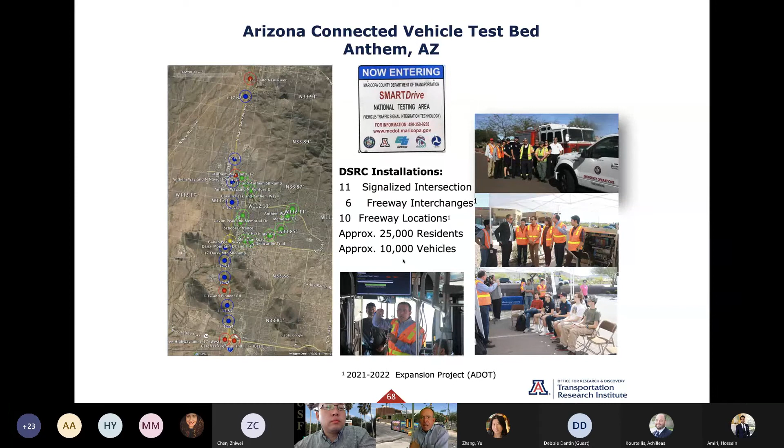What I love about this place is it's a developed community with 25,000 residents and 10,000 registered vehicles that have to go through our traffic signals to get in and out. There's essentially a wall around this community. If I could get 2,000 or 3,000 of those vehicles equipped, we'd have 20 to 30% market penetration and could learn some really important lessons. We've done demos for lots of different people and have great partnerships out there.